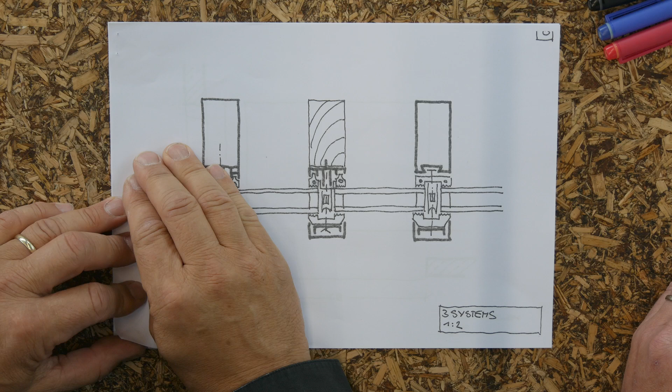Things like this. So again, aluminium system, wood system, steel system, as we sketched it, as we designed it, the situation like this, the main grid like this, as we agreed on, the idea about tolerances, which is shown, and here the main system.

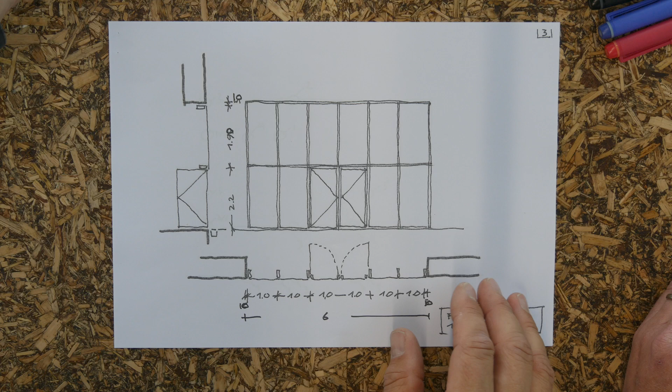Let's start with scaffolding. How would I build it? I would just start placing the sticks and then adding the glass. Ground, no problem. First floor.

It starts from how the detailing is about. Is the detail about working from inside out or from outside in? Here we can work from outside in. So then you, of course, start with the mullions. Okay, that's the best idea.

And of course, you have to — I think you have to have a kind of cherry picker to fix it at the top position, because you and me, we're not 4 meters long. Unfortunately. So we need a cherry picker to get there.

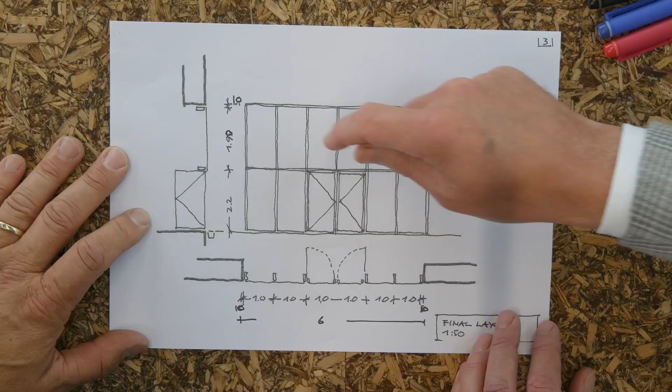So at a cherry picker, you wouldn't install a scaffolding thing, you would actually do it with a cherry picker? Well, for this size I would, because then I have the opportunity to get all the panes in. Otherwise, with scaffolding, it's very hard to get all the panes in.

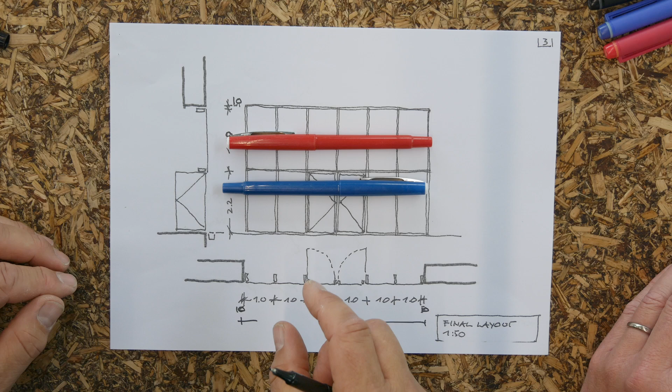So if we have a scaffolding like this, with the 2 meter floors, level, nice, okay, but then you have to somehow maneuver the glass plates at the back. And glass is brittle, so keep that in mind.

Okay, so cherry picker, there's enough ground at the surface, so I can place it here and then get in position, fix the detail, get in position, fix the detail. Then install all the components, and then the glass itself will be brought there as well, again with the cherry picker. So it's going to be fixed at the cherry picker.

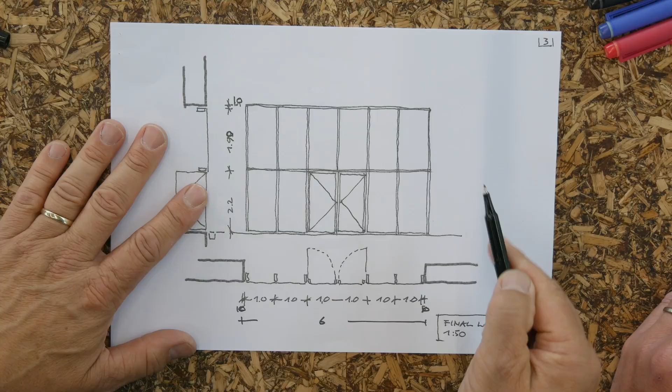So I'm going to have a device, something like this, with an arm, and then wheels, and this whole thing is going to move. And of course, a person who will install it. And then the glass panes are going to be placed here with vacuum fixation and then brought in position.

Okay, that's a simple one. It's also not a huge size, so that would be something which would work. Scaffolding done, check. The details we talked about, and now impact.

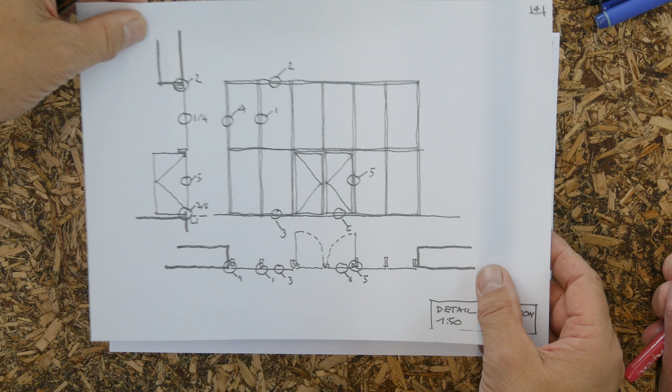Let's talk about impact here. What about, say, a person impact, which I assume would only happen in this lower part. So when we talk about the person, here it comes, it may bounce into the facade. But what kind of load do I have to count?

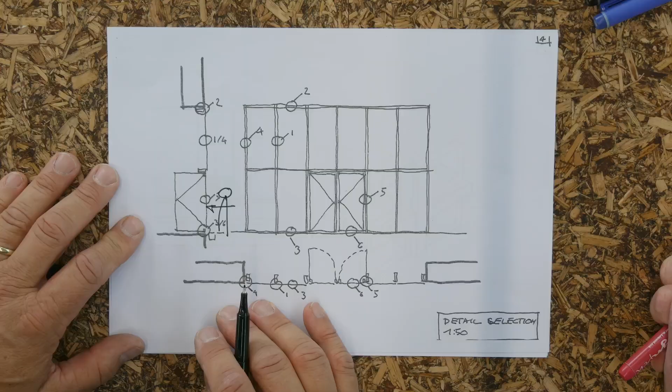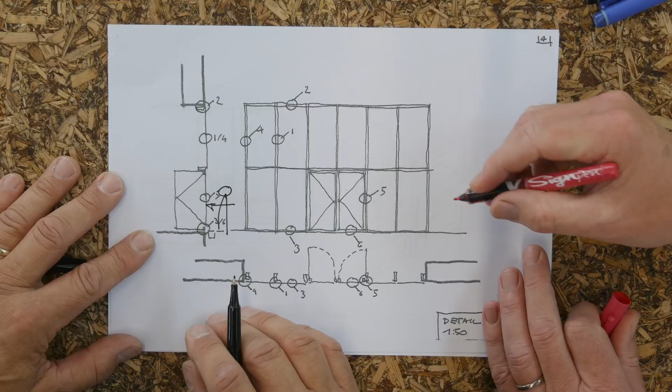Well, it's very funny, because this situation does not exist in the codes. Because you only have a horizontal force when you can fall down. So, funny enough, there are no rules for this one. But it's wise to have, I call it a shoulder load, that somebody can hit. So, I would say, if somebody of 100 kilograms will hit, you have a horizontal force of 1 kilonewton.

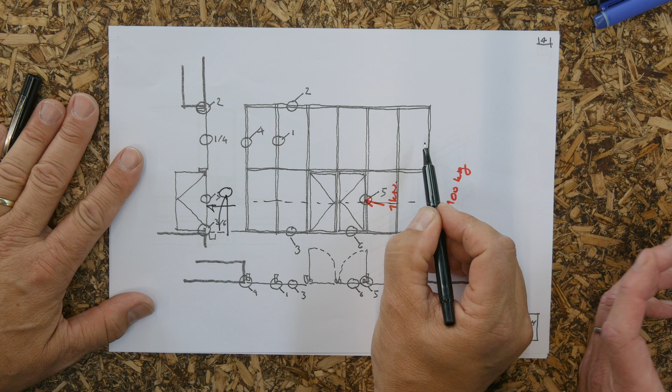Then you're on the safe side, and it's going to be okay. And as we hit like this, this is kind of a soft body, not a sharp edge, so it's a soft body impact of 1 kilonewton, which we assume to happen somewhere in this line. We don't expect that to happen here because no one is able to go there. There's no floor here. If we have a balcony, this may be different.

But that's a different story. And then somebody could fall down from inside to outside, and then you have the rules which say you have some extra load. This is body impact. What else can happen?

Imagining this is going to be a super important building, and we expect an embassy, we expect a risk of bomb blasting, which is the maximum extreme. It's not detailed like this, but what would we take care of if we needed to think of it? Well, you have to imagine that people do not die from the blast itself, or from tables falling down.

People get hurt because of the shattering of glass, so you have to prevent that. Here you had one of those nice horizontal details. What you would like to prevent is little shatters of glass from this breaking and becoming a projectile that hits anyone. So it's very important to have laminated glass, with two panes or more laminated together, so there's no shattering.

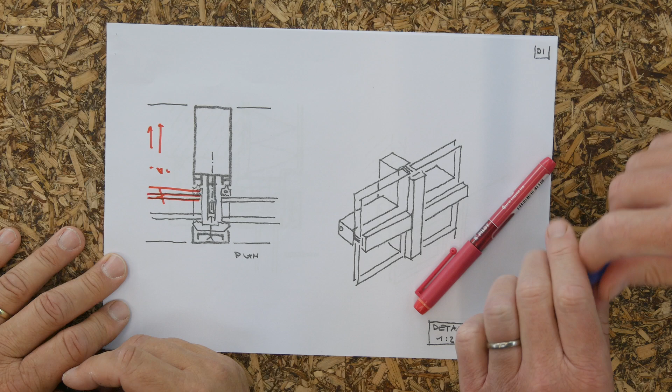And of course there's always this foil in between. You have to really connect this foil. It's like a cable, a very elastic cable. So it's important that in case of a blast, that whole force somehow finds its way through this.

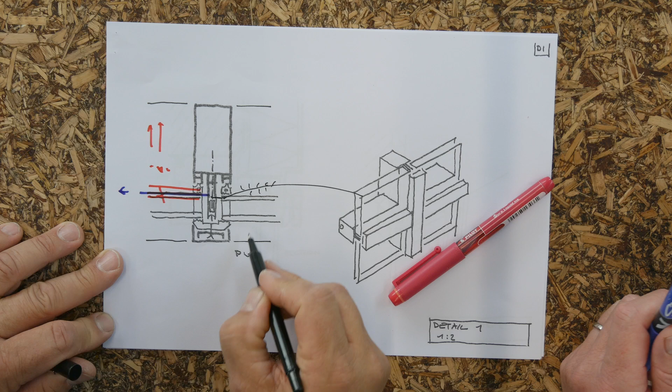Then the glass is going to break into pieces, but the foil being fixed - not in this system, a different system - is going to be fixed in here. And of course we can imagine the aluminium piece needs to be a lot larger because it needs to withstand that impact, and the glass will stick to this foil so nobody gets hurt. That's the idea: we allow the facade itself to deform and get destroyed, but not fly as a projectile.

Okay, this is body impact we talked about, and this is bomb blasting we talked about. Then burglary - let's talk about burglary here.

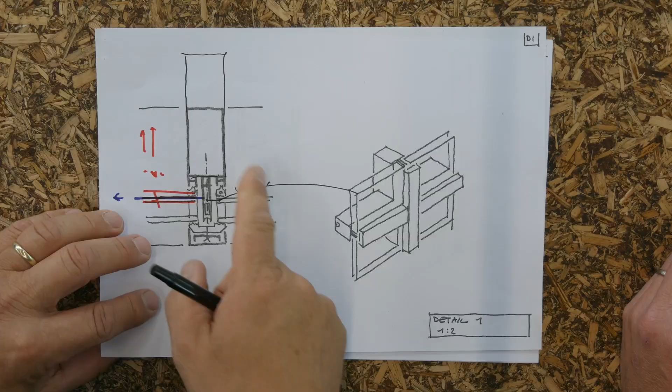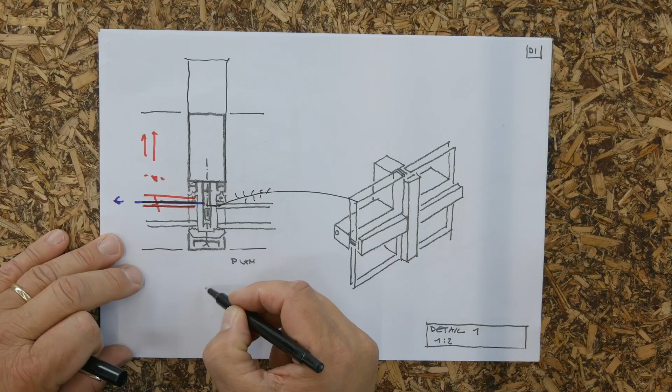How can I open it? Well, when I think about the details we saw, we take off the cover cap, then we have the screw. Burglary is about how much time a burglar needs to get in. So what type of screw do you use - a simple one, or are there also burglary screws? If it's something like this, then it's a simple one with a screwdriver.

But if I get to something with more complex geometry, can I somehow lock it, can I glue it? Of course, but it takes more time. You could also think about this cap - maybe I already have some bolts there so I can't get it off easily. So it's only about delaying the time to get in. If I have several layers where I can delay it, then you're on a good way to make it burglary proof. Same, I guess, for the glass.

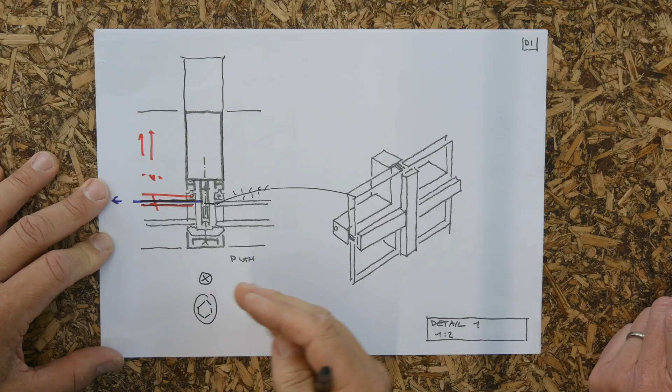If I just break the glass, it gives noise, and I don't want that. If I have laminated glass, then breaking it is going to be a lot more complicated. The more layers you have, the more complexity and time it takes to get in.

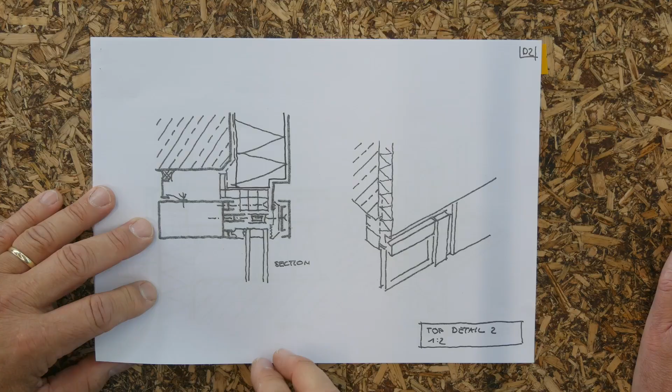Impact, soft body and person impact, bomb blast, burglary - we talked about all that. What about fire? In case of fire, we take the horizontal cut because fire normally goes upwards. So imagine there's a fire here, and imagine this is a floor - I just draw it a bit as a floor.

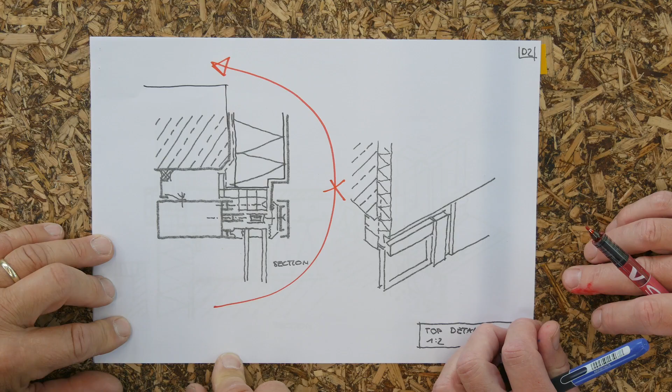It's not in this detail, but I imagine it being a floor. What happens here - there's a fire here. What you have to prevent is fire going from here to there. That's not what you want. So you have several options: you can make the glazing fireproof, a laminated glaze with a liquid in between - it's like a foam, and if it gets hot it expands like insulation. That's how fire protection works in glass.

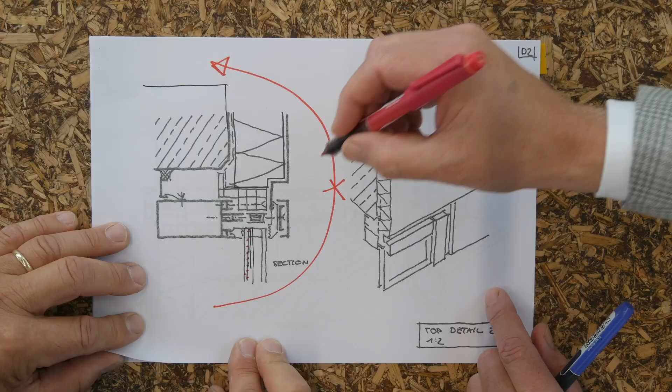You could do it here, but you could also do it there - you could make this facade fire protected too, same setting. Or you could divide it: say 1 + 2 is my total fire resistance, so 30 minutes here, 30 minutes here, making 60 minutes total.

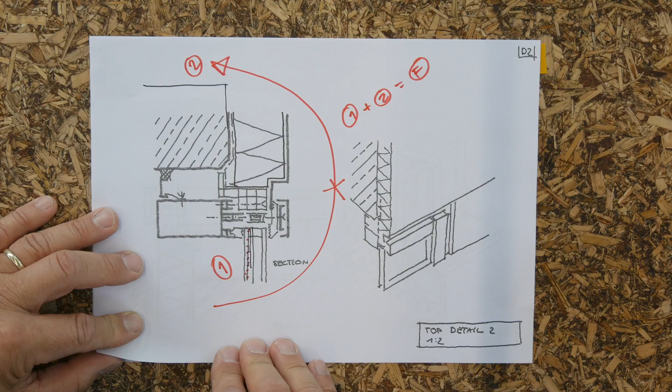Next setting: smoke. If I seal it here, smoke will not find its way through. If this is a solid piece, smoke will not find its way. That's a kind of setting. And of course this should not be burnable, so it always has a fire class - this should be non-burnable as a setting.

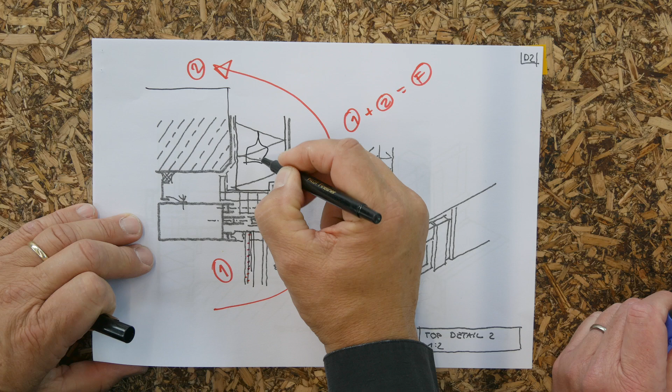We talked about bomb blasting, soft body impact, the scaffolding, the construction itself. I think we covered all the jobs I needed from you as structural engineer. Let's go back to the one with the construction. This is pretty much it. Thanks - you're welcome.